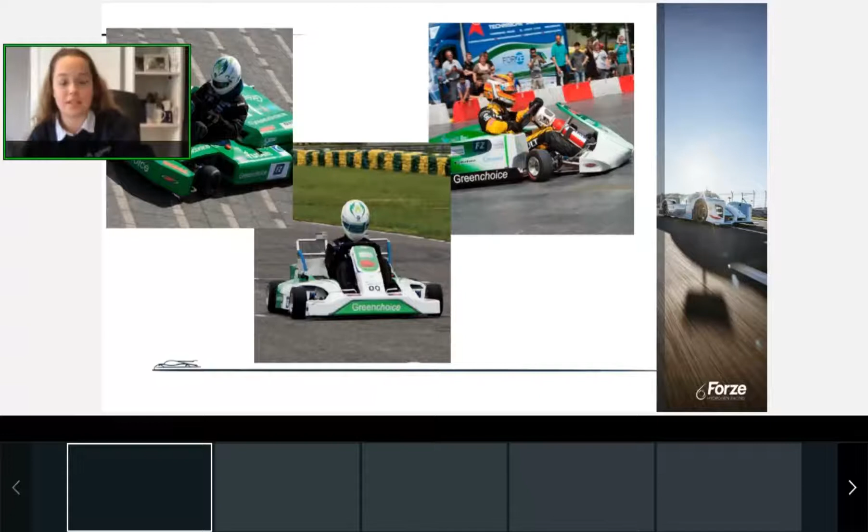Which is when we decided that we wanted to go a little bit bigger. So we decided to start competing in the Formula Student UK competitions, which is the two green cars, the Forze 4 and the Forze 5, which you see on the left as well. It's held annually in Silverstone.

We achieved quite some impressive results, but we decided that we wanted to go even bigger, so we decided to build the Forze 6, which you see on the right-hand side in blue. It was the first actual race car that ran on a fuel cell, with which we set a Nürburgring lap record, which is pretty exciting in my opinion.

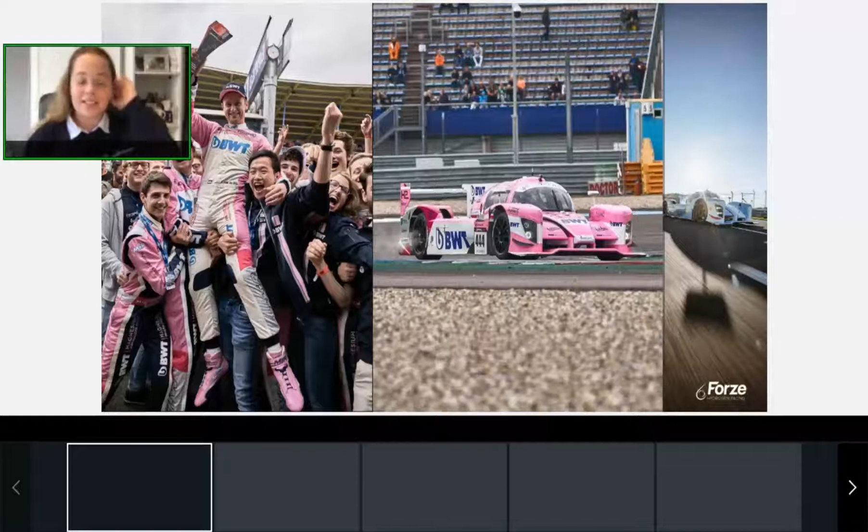After that, we decided we wanted to go even bigger, so we started building LMP-based hydrogen race cars. We started out with the Forze 7, which isn't pictured, but in the pictures here you see the Forze 8, which is, as David already mentioned, the car that we competed with in the Supercar Challenge at the Gamma Racing Days in Assen in 2019, where we came second in the sports class. In my opinion, it's pretty impressive that a student team came second place against actual petrol-powered cars.

And now we're looking into the future. We're currently in the process of building our newest car, the Forze 9, which is going to have 240 kilowatts of fuel cell power and boast a double fuel cell system, and it's going to be all-wheel drive. And with that, we hope to participate in GT class racing, Porsches, Lamborghinis, and the likes. And our mission is really just to show the world that hydrogen is the fuel of the future, and that it's our most promising energy storage going forward.

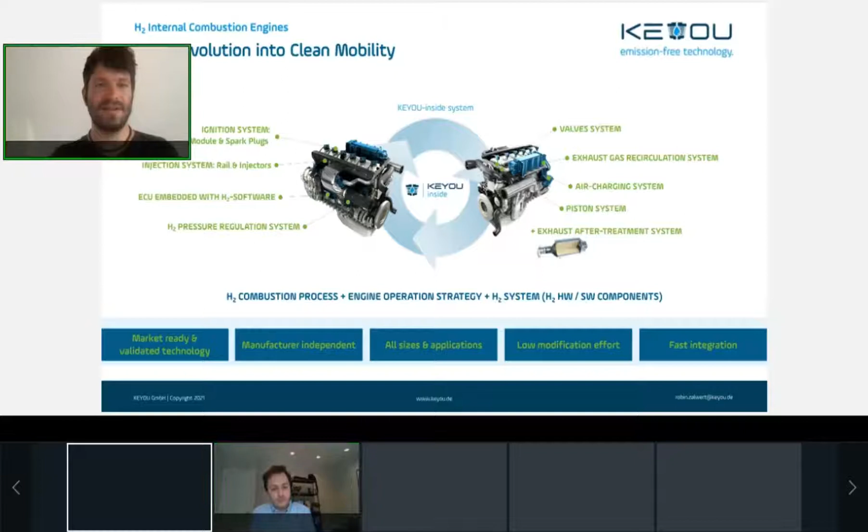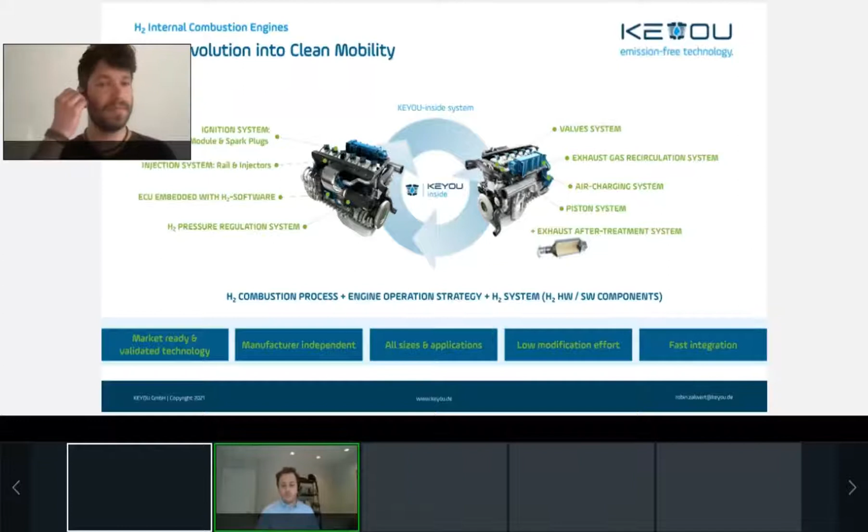I am so sorry, Robin, but your microphone I don't think is working. I hate to interrupt what I'm sure is a fascinating presentation, but I'm not sure it's one that the audience can hear. Is everything okay with your microphone? I'm afraid I can't hear you. I tell you what, while Robin is figuring that out, why don't we move to Matt Candy's presentation, and we could always ask Robin a couple of specific questions afterwards, just to give him a bit of time. I'm so sorry, Robin. Here's Matt. Great. Can you hear me? Loud and clear. Perfect. Thank you.

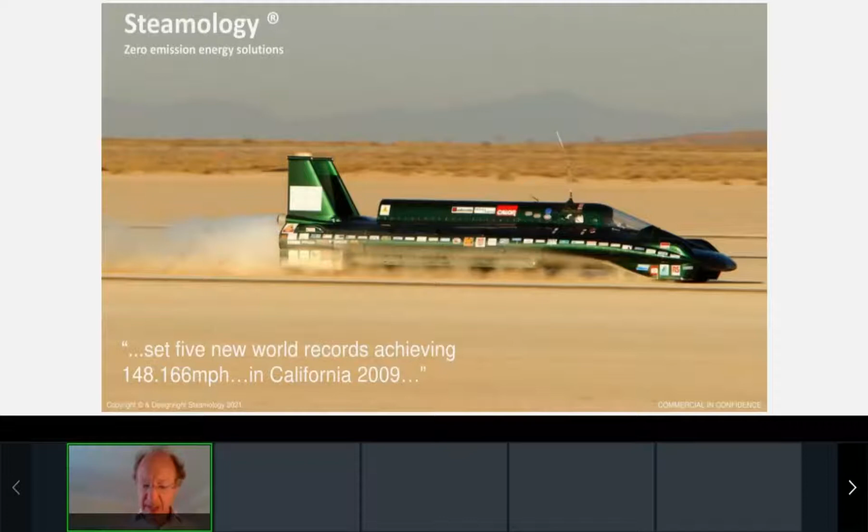Hello. So my name is Matt Candy, and I'd like to introduce you to Steamology. 10 years ago, the Steamology team broke the world land speed record for a steam-powered car, and the project gave us experience in high pressure and high temperature steam and steam turbines. We broke the record, but we did not smash the record. And so 6 years ago, we started to take a new approach for zero emission power.

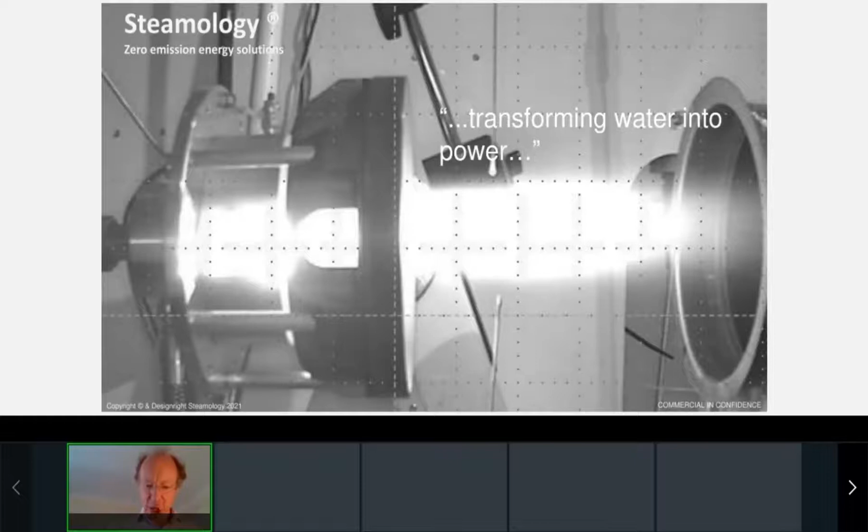The combustion of hydrogen and oxygen creates clean green steam. There is no carbon, no NOx, no SOx or particulate. The only product of combustion is hot steam. We're transforming water into power, and this is at the heart of everything we do. We know that renewable energy is plentiful, but it's intermittent. 10,000 times more solar energy strikes the earth every day than we use, and it's free.

Renewable energy can be used to power electrolysis, and electrolysis creates both hydrogen and oxygen gas. The gas is collected, compressed, and stored in tanks. And these gas tanks are the battery, the energy storage of our system, so that when the sun has gone down or the wind stops blowing, energy is demanded, gas is combusted in our steam generator, the steam delivers power, and water is produced that can be returned for electrolysis.

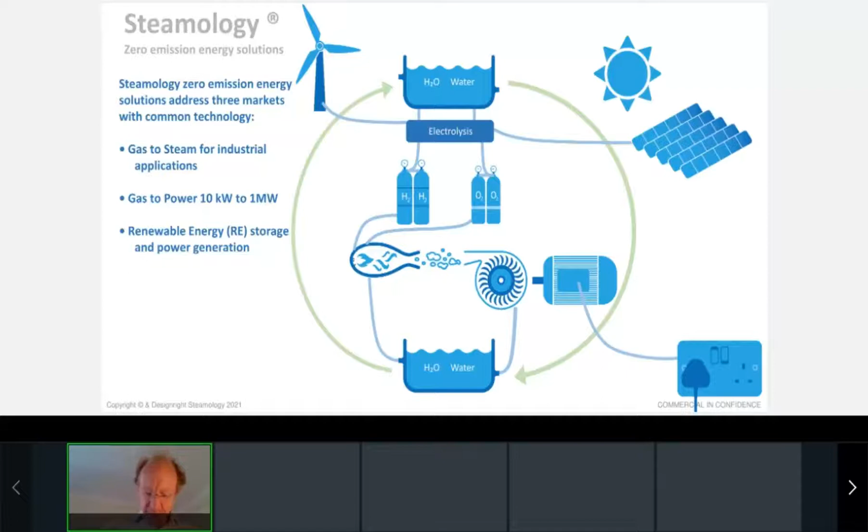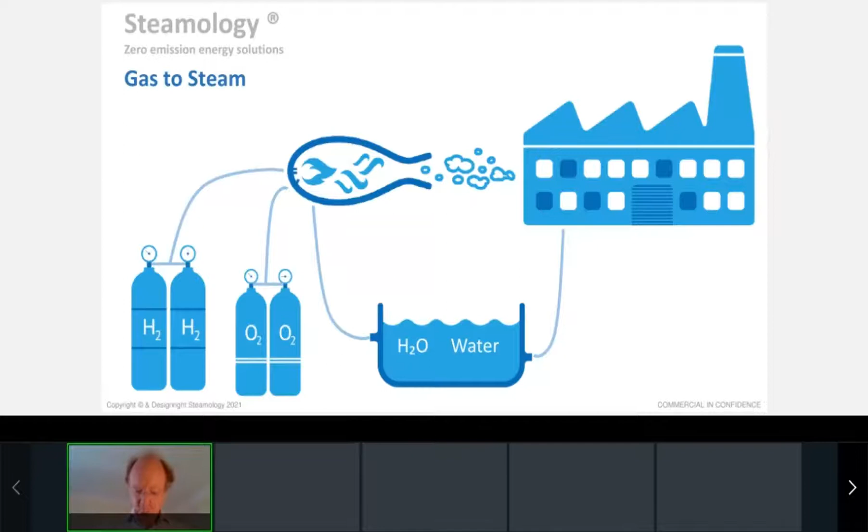We have three product groups that share the same common core technology. The first is gas to steam. So stored gas is used to generate steam with a number of industrial process applications, and zero emission steam is generated within seconds at a wide range of quality and quantities. This can be used for distilleries, or pure steam can be used for pharmaceuticals.

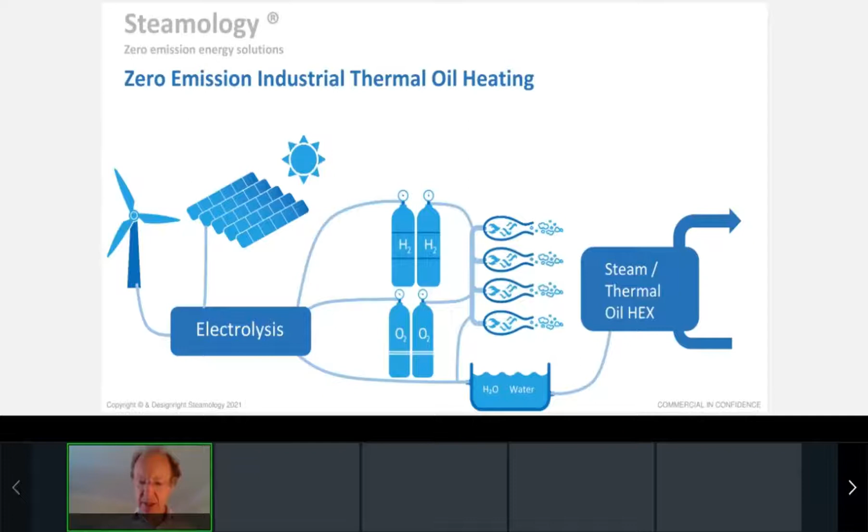Saturated steam can provide zero emission heating up to 250 degrees C for thermal oil heating. This is replacing gas or heavy fuel oil burners for continuous or intermittent medium grade heating. The second group is gas to power, and here stored gas is used to generate steam to drive a turbine. And this is diesel engine replacement from 250 kilowatts to the megawatt scale.

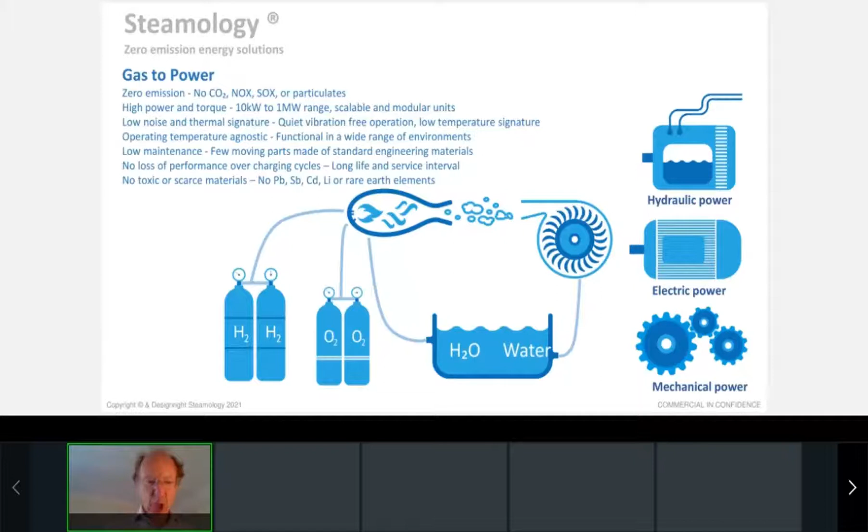The steam turbine can provide hydraulic, mechanical, or electrical power, or a combination of these. And Steamology technology is quiet and does not use rare or toxic materials. It's fully recyclable at the end of life. Gas to power markets include transport and static applications, and we've been developing high power steam turbines for industries facing imminent decarbonisation regulation, such as trains, trucks, and ships.

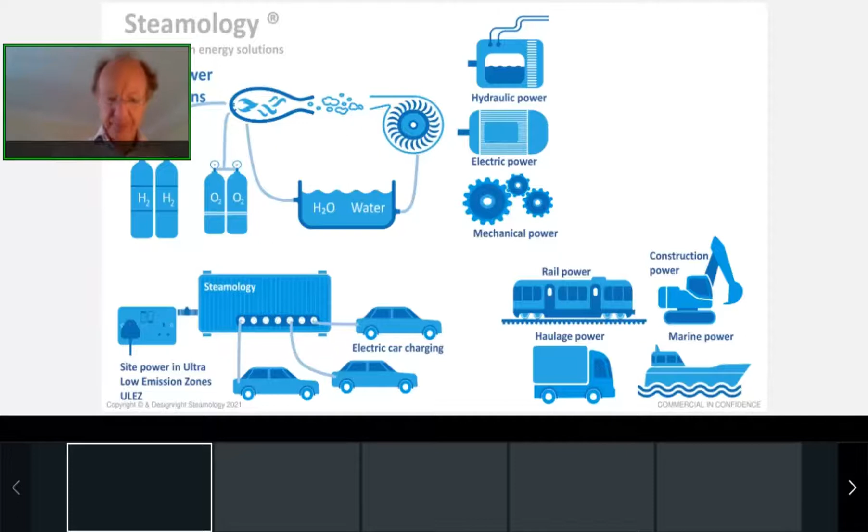Compared to hydrogen fuel cells, we have three distinct advantages for high power applications: much more energy dense, much longer life, and much more cost effective. The third product group is renewable energy storage and electrical generation for on and off-grid applications.

So we have facilities near Salisbury in Wiltshire in the UK. You're really welcome to come and see our zero-emission high-power turbine demonstrations, here pictured in the test cell. And we're looking for industrial demonstrator and commercial sales.

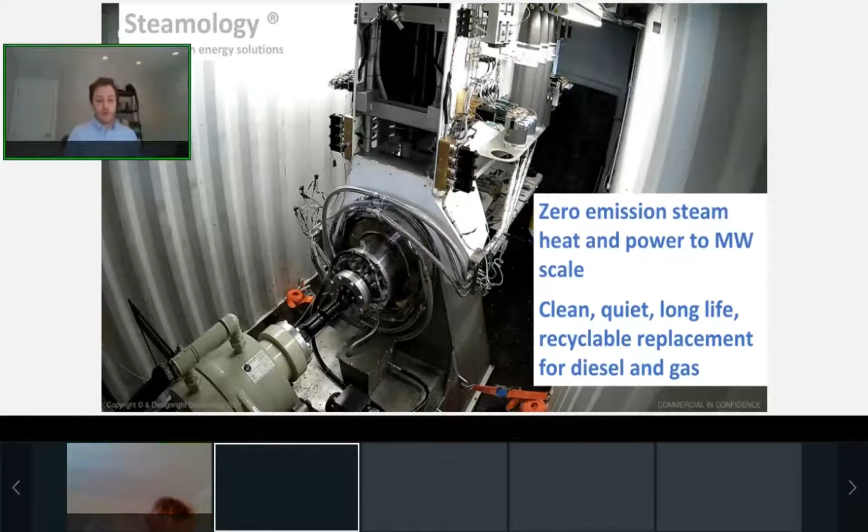Thanks, Matt. Thanks very much, Matt. I think without further ado, we'll now move to the broader question to all of our panel. If we could bring all of them back on stage, and hopefully Robin's managed to sort out his microphone bug. Any sign of Robin? Also, Ricardo, if you'd like to unmute your microphone, that would be great as well. Thank you. Okay, I'm not seeing Robin here, but I think we should probably crack on.

This is to whichever of you would like to answer the question first. I'm interested to hear about where you see your technologies being applied beyond their current applications. So perhaps Ricardo first, because you've been working with racing cars. I was very impressed to hear you broke the Nürburgring speed record, which is very cool indeed. It's often the case that technologies in Formula One and regular racing are applied elsewhere and eventually make their way into other forms of transportation. Do you see the same thing happening with your cars?